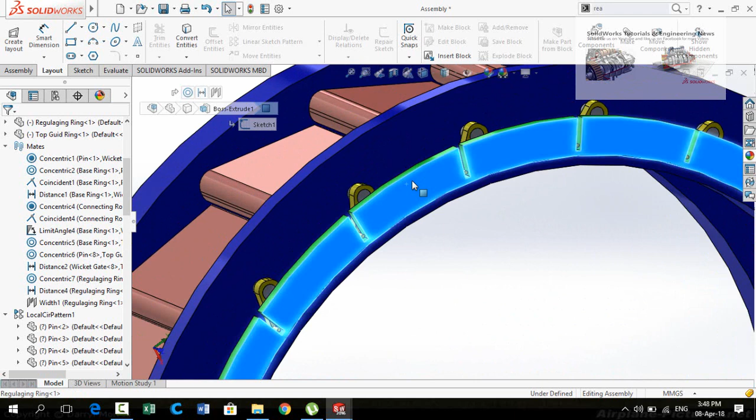Bismillahirrahmanirrahim. Assalamu alaikum friends. In this video I am going to design and assemble a complete wicket gate assembly of a Francis turbine in SolidWorks.

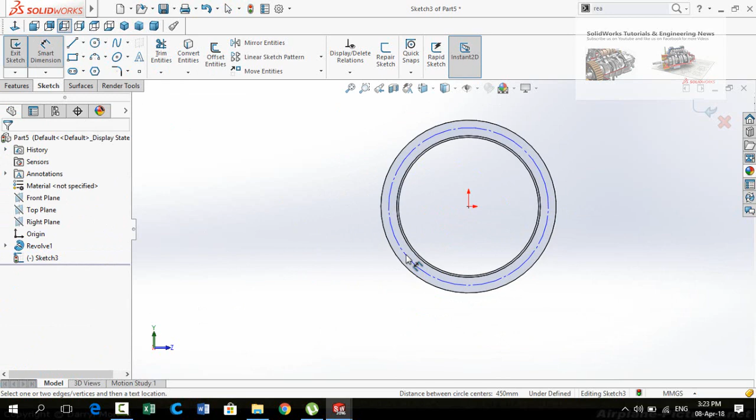Draw a circle started from origin. In the left side, check this box for construction. Press OK button. Now define the diameter of this circle, which is 450 millimeter.

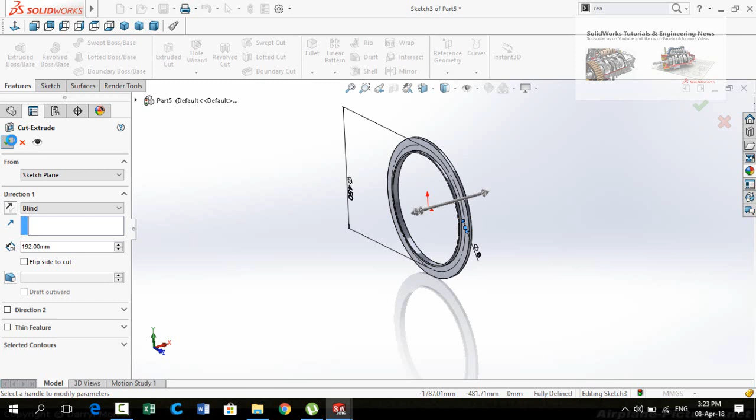Draw another circle on this point. Define the diameter for this circle, which is 8 millimeter. Then go to Features tab and apply Extruded Cut command. Press OK button. Now click on this arrow below the linear pattern and select circular pattern.

Drop down these options and then select Cut Extrude 1, which is this circle, and then click on this pattern axis box and select this circular edge. Quantity is 20 and check this box equal spacing. Press OK button.

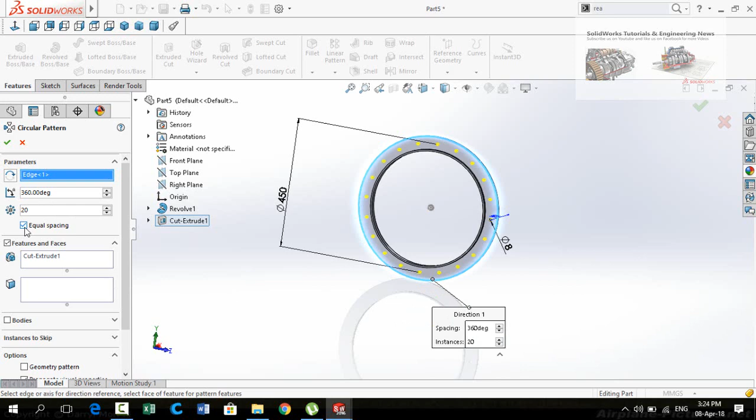So this is our top guide ring. Save this part.

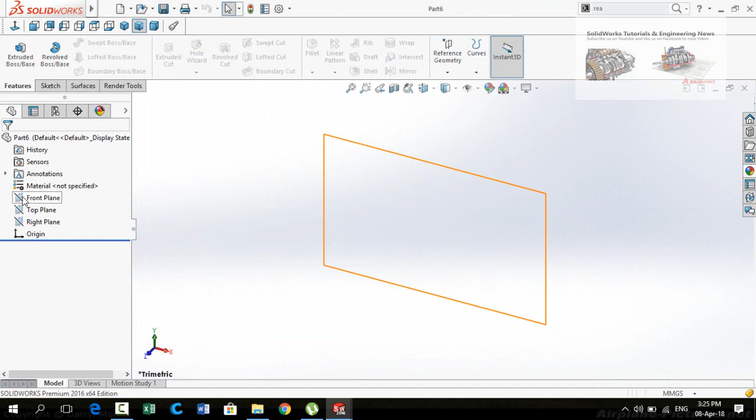Now we have to design a regulating ring. So for that, start from a new part, then sketch on front plane, and draw two circles.

Now define the diameter of the outer circle, which is 450 millimeter. And the diameter for the inner circle is 410 millimeter.

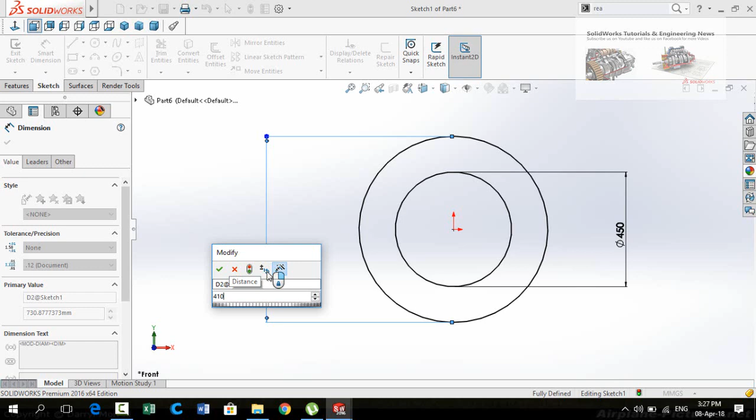Now press OK button and then go to Features tab and apply Extruded Boss/Base command. Extrusion thickness is 5 millimeter. Press OK button.

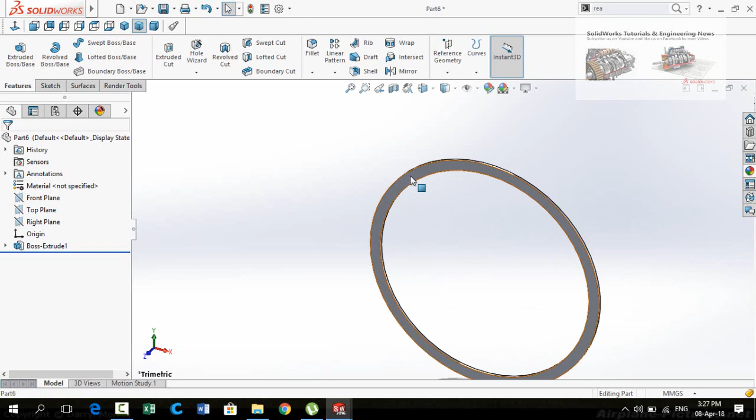Then click on this face and sketch on it. Make normal to, and then draw a rectangle.

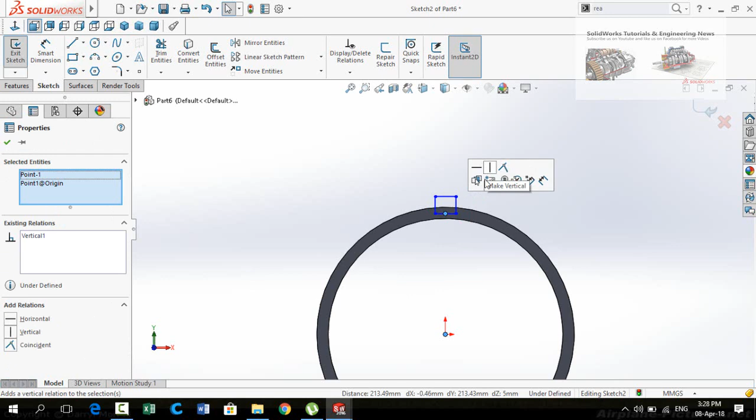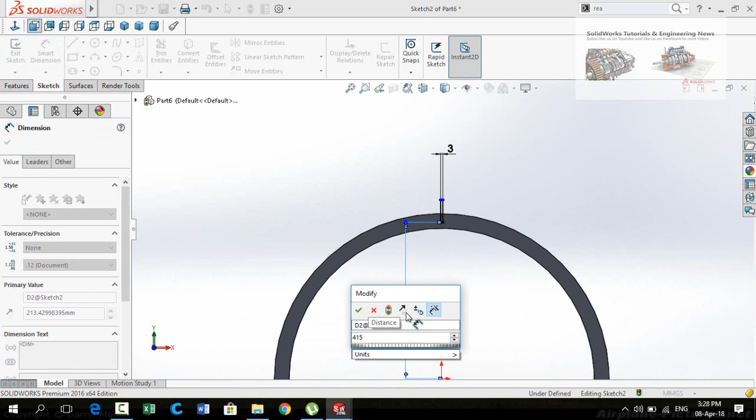Now select the origin and then this midpoint. Make the relation vertical. Now define the distance, this is 3 millimeter, and the distance from origin to this line is 415 divided by 2. Press OK button.

Again press OK button. Now go to Features tab again and select Extruded Cut command. Cut it from throughout. Press OK button.

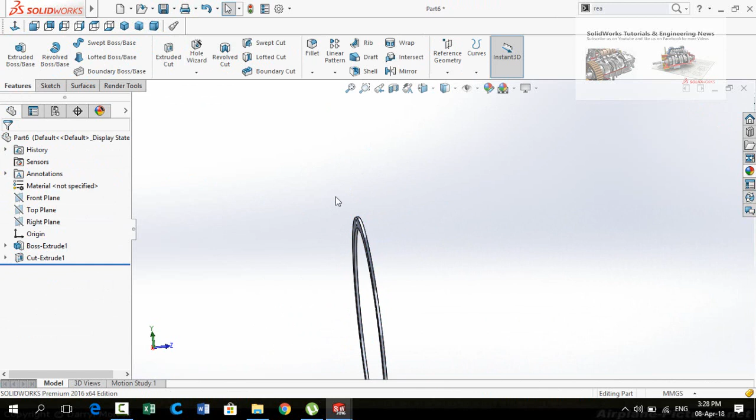Now click on this arrow below the linear pattern button and select circular pattern. Drop down these options and select Cut Extrude 1, then click on this pattern axis box and select this circular edge. Quantity is 20. Press OK button.

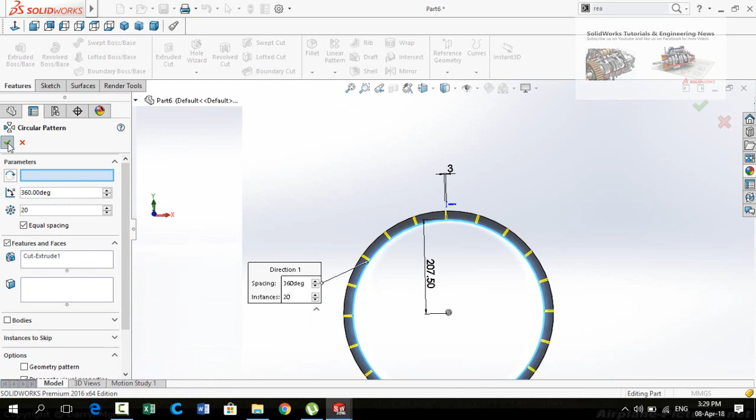Now save this part as regulating ring.

Now go to assembly and import both of these parts in the assembly. Now you can hide this center line, so click on it and then hide it.

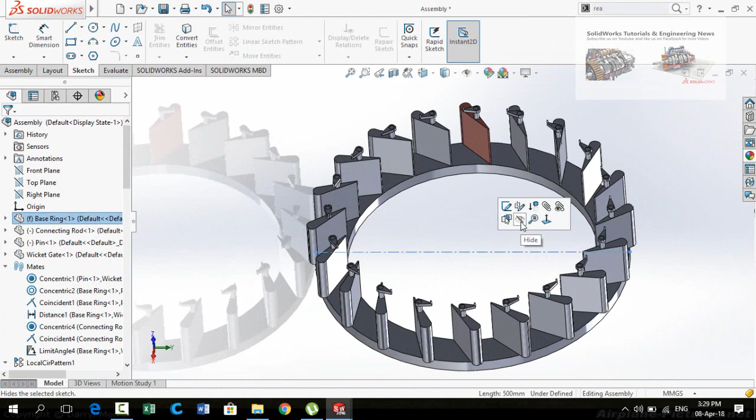Go to assembly and then press the insert component button, scroll down, press and hold the control key, then select top guide ring and regulating ring, and import them in the assembly.

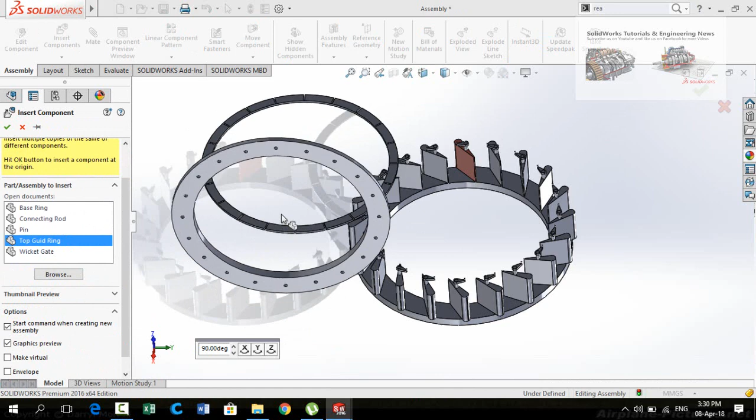Now select the cylindrical face of top guide ring and then select mate. Now select this cylindrical face of base ring. Click on this button to flip mate alignment and then press OK button.

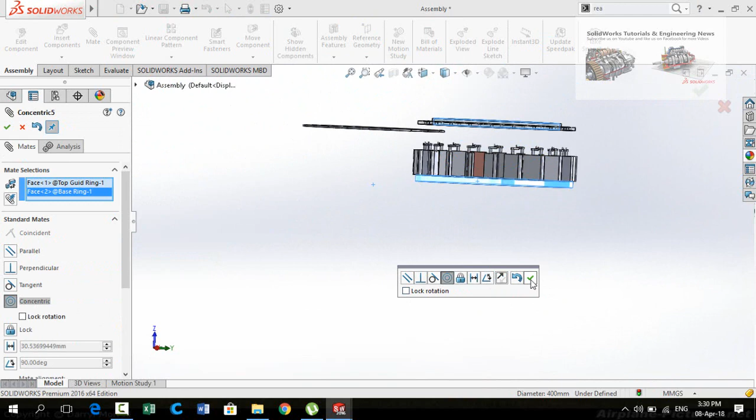Now select this cylindrical face of pin and then this cylindrical face of top guide ring, and press OK button. After that, select this face of wicket gate and then this face.

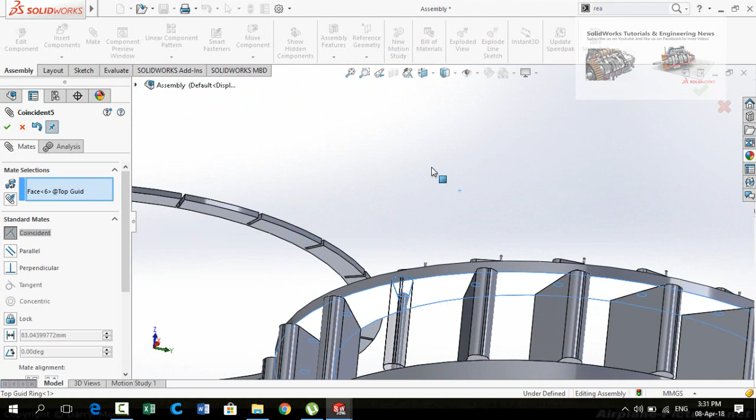Click on this option distance and type the distance 1 mm. Press OK button. Again press OK button.

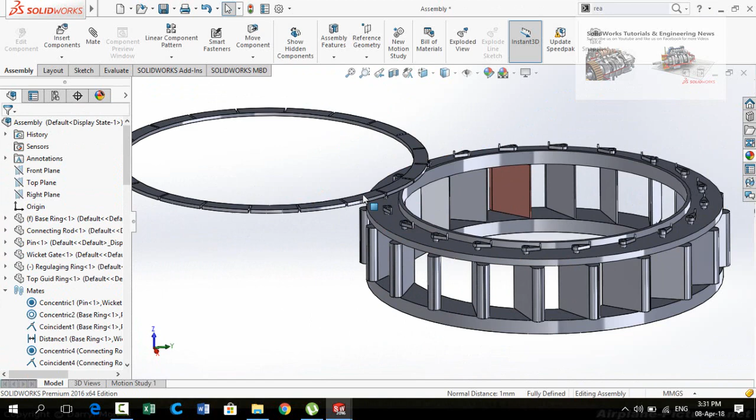Now we have to assemble this regulating ring with the top guide ring. So for that, click on this cylindrical face of regulating ring and select mate. Now click or select this cylindrical face. Do not lock rotation. Press OK button.

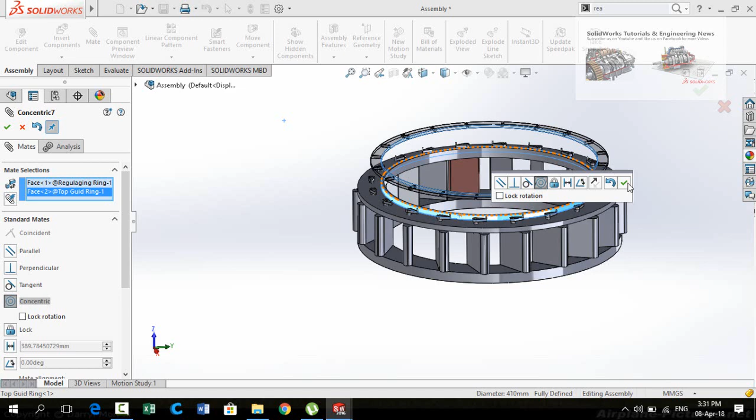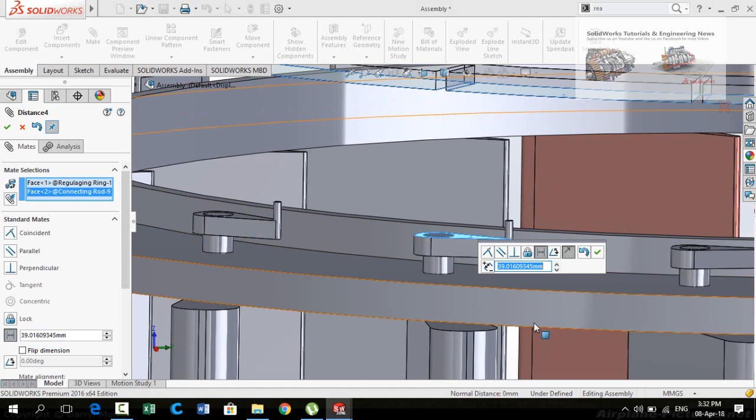Now select this face of regulating ring and select mate, then select this face of connecting rods. Select distance mate and type the distance 1 mm. Press OK button. Again press OK button.

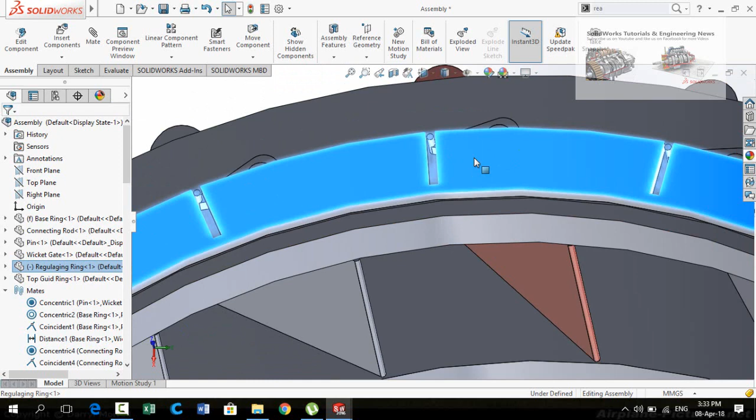Now we have to create a width mate for this pin. For that, click on mate option, then scroll down and select advanced mates. In the advanced mates, select width.

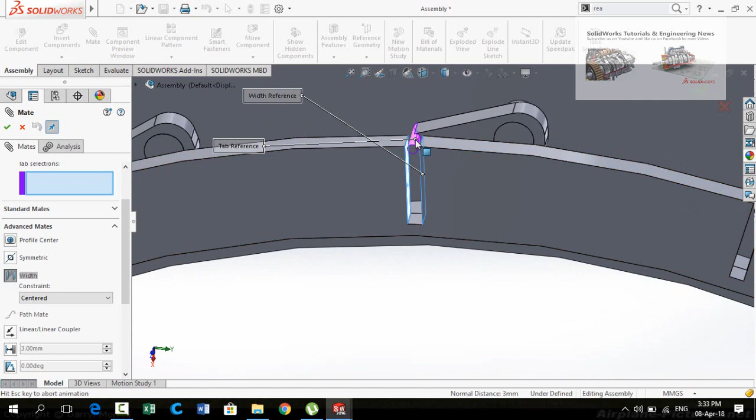Now select both of these faces of regulating ring and then this cylindrical face of pin. Press OK button. Again press OK button. Now let's see what happens if we rotate the regulating ring. So our whole assembly is working.

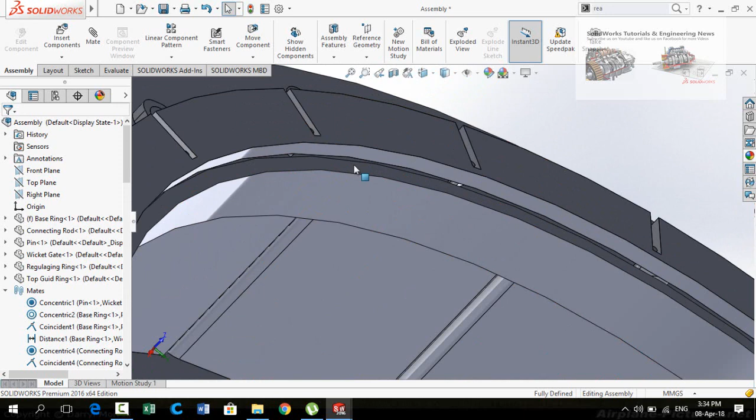Now what we need to do is extend this collar up to this face. So first of all we have to measure the distance. It is 6 mm. So click on this top guide ring and open it.

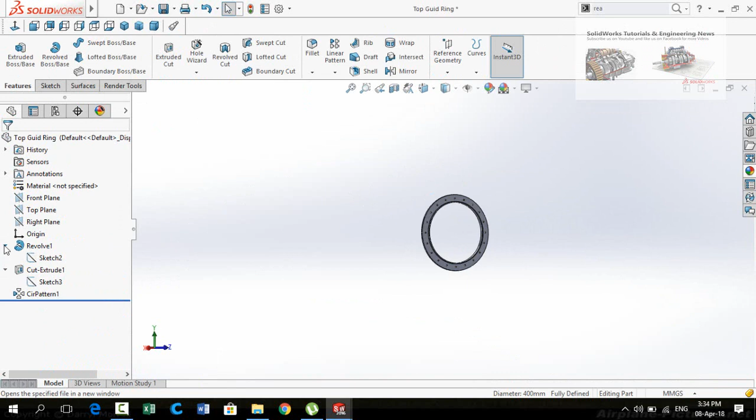Then edit this sketch for revolve. Make normal to, and then type here 16 mm. Press this button to save and exit from the sketch.

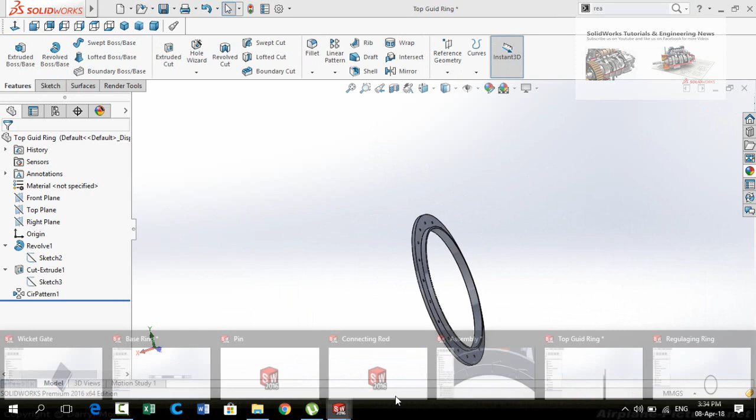Now go to assembly again. So the whole system is now okay.

Now we can change the colors and appearances of all parts one by one.

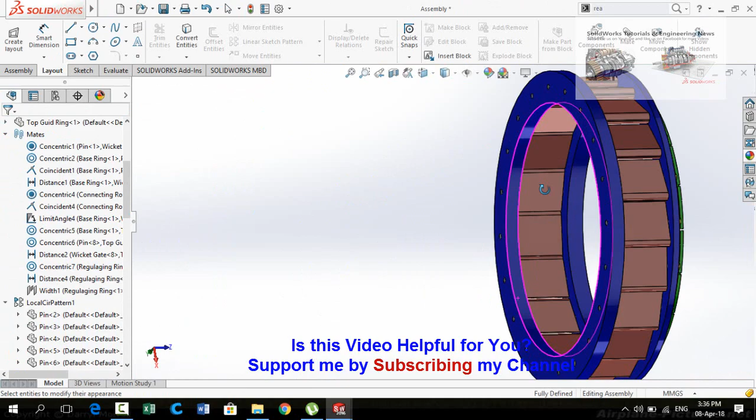So this is how we have to create the Wicket Gates assembly of a Francis turbine. Hope you enjoyed this video.